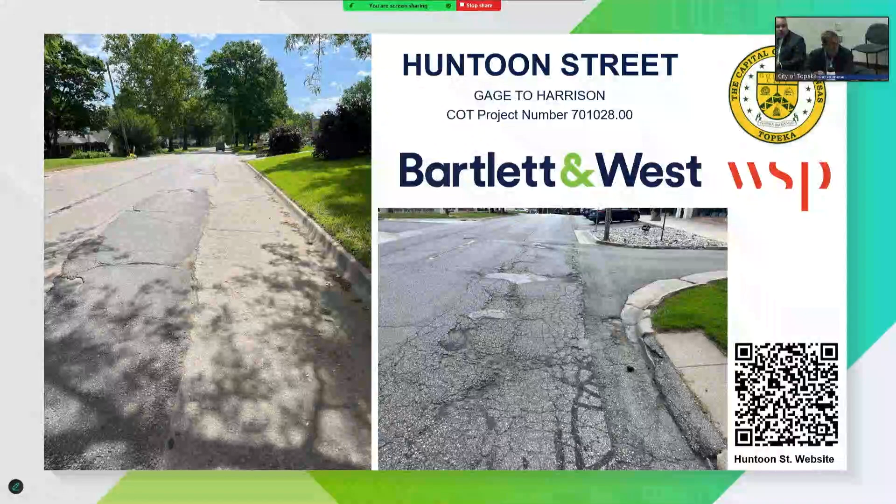Once that has been determined, then we will come back to the governing body with the design contract based on the guidance that they provide us. So Bartlett and West was selected as the consultant to provide the design services. And I will have Jeff Lawley provide an overview. He's prepared a PowerPoint presentation in terms of where we've been, what our options are, and our recommendation. Good morning, Jeff.

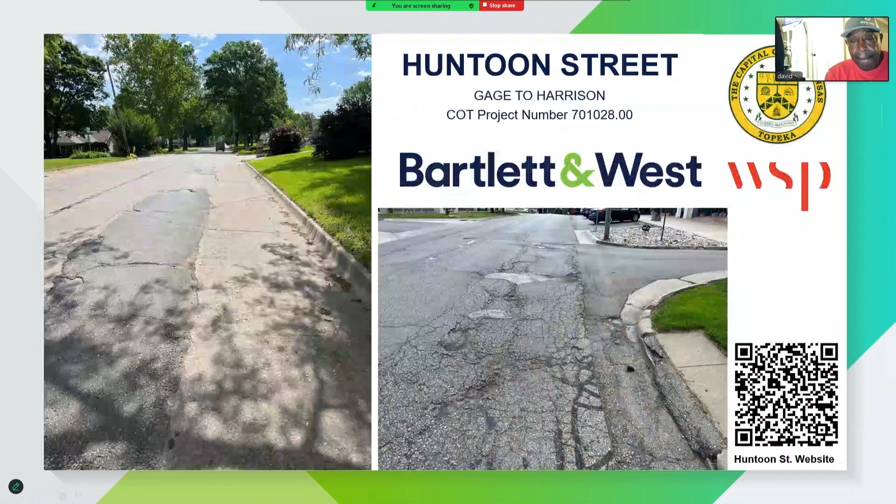Good morning. I'm Jeff Lawley with Bartlett West, the project manager for the Huntoon Street project. We are here to talk about what we've been up to over the last 3 to 4 months.

So currently what we've done is we've gone out there and had them core the existing roadway just to see what's going on beneath the pavement and understand, is there something going on beneath the pavement, or is it the pavement itself that's falling apart? We have some pictures up here of some of the cores that we have taken. It's not all the pictures, but a pretty good representative of what's going on for that 2.25 miles. And just from the cores, you can tell that most of the pavement's not really falling apart. I think you guys have seen some other cores for some other projects where you can just tell that things were not going to hold together. But from these cores, it looks like things are pretty good.

We've also done an existing utility review. We've looked at the city of Topeka utilities out there as much as we could to this point with sanitary, water and storm, just to see what all we have out there available to us. And we've also looked at third parties to see how much of a presence there is with fiber and Evergy and other third parties, just to see what's all going on in that corridor. We've also done a traffic study. Our partners with WSP have also done a traffic study to kind of give an idea of what's all going on out there. We compared that with 12th Street. They've done a traffic study out there as well, a post-construction traffic study. So we've got all that information to kind of help guide us on where we want to go in the future.

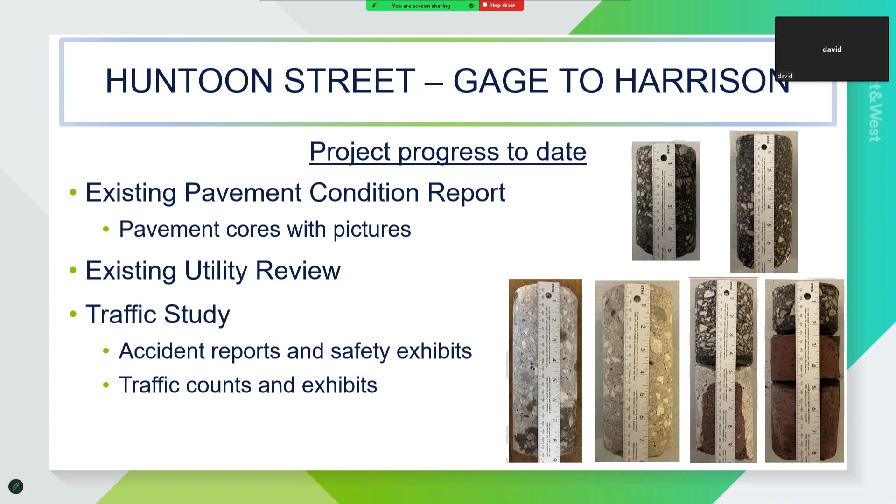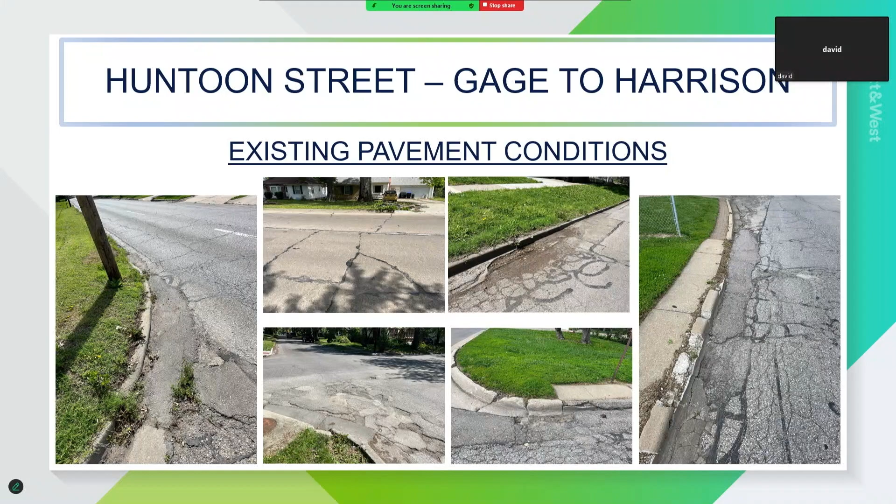Can I ask a quick question? Yeah, this is a presentation, but definitely if you have questions or comments, please feel free. Did you take cores on all parts, north to south of the road, not just going down the center or something? Yes, the different locations were all over the different parts of the roadway. Okay, yep, that's a good question, just to make sure you're not hitting the same thing over and over again. That's a very good question.

So for the City of Topeka utilities, we'll start with sanitary. Right now, they're finishing up videoing all their utilities through that area to get a better understanding of what they may need to do. The plan for sanitary is to handle any pipelining or other work before the project were to ever start. From what they've been able to see, they don't think it'll be very intensive, but we have a dollar amount in there just to have an understanding of what might happen with the sanitary utilities. If anything needed to be replaced as part of the project, it would be eligible for funding by the countywide sales tax funds used for the project.

For water, that's a little bit more intensive. A lot of the utilities throughout there are old and undersized, and we don't have enough pressure for fire lines and things like that. It's a suboptimal situation with the water, so we have a pretty wide spread there of 2.7 million to 6.3 million. The 2.7 million was just the bare minimum to replace aging utilities, and the 6.3 million was to get it up to speed to where it needs to be. There's a 12-inch water line that needs to be installed along Huntoon, either for the entire length or certain portions, to go along with what was done on 12th Street, making sure that corridor is properly fed for all the different properties and fire lines. We don't really know how that would work, but it is also eligible for funding by the countywide sales tax funds, any of that water work that's going on there.

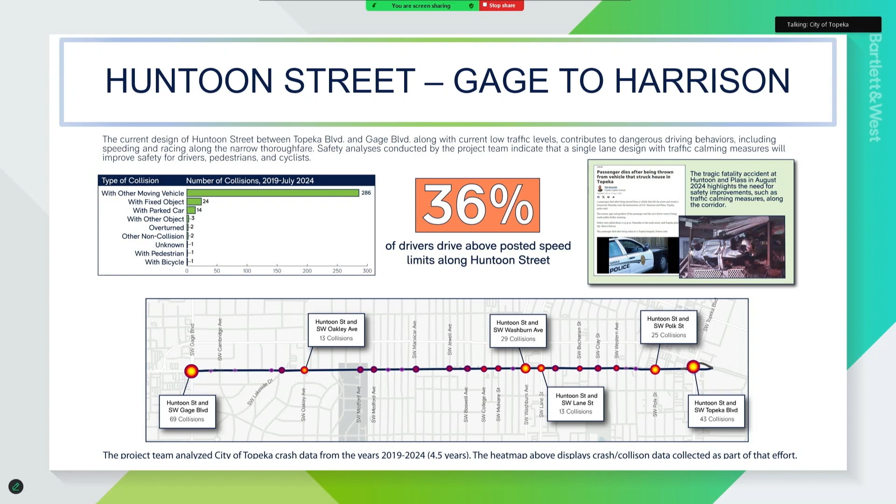And then we included the picture of the unfortunate accident that happened on Huntoon in August, where somebody left the roadway and ended up in somebody's front door, and that included a fatality. We thought that was unfortunate, but we wanted to make sure everybody was aware that it happened on Huntoon.

So that goes along with the next part of the study, which was: do we really need two lanes? And if we were to build with just one driving lane, would that be sufficient?

But then that goes on to: okay, if we only need 1 driving lane, what else is out there? We can't build a roadway with 1 lane and curb, that just doesn't work. If there's an accident, you need some room on the side to allow people by or allow emergency vehicles to get through. So we need to find out what else would be adjacent to that drive lane.

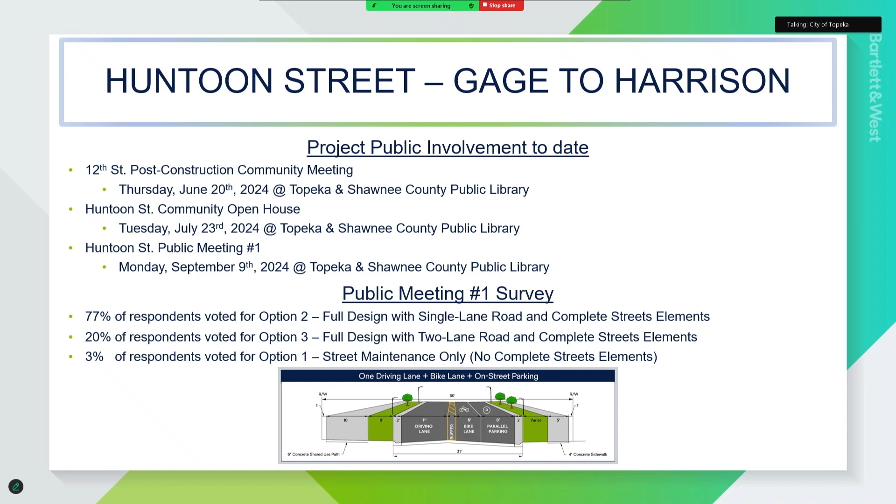The third option was a 2-lane roadway, and it says complete street elements, but really the only thing we'd have room for is a shared use path. We could do some other improvements, but with a 2-lane roadway you don't have room for a bike lane and on-street parking — we just don't have the right-of-way, the room, or the budget to do all of those things.

So we presented the public with those 3 options, and out of all the people who responded, both at the meeting and online, only 3% voted for option 1, just doing street maintenance. 77% of those who responded voted for the single lane road with some type of complete street elements. At that meeting, we had everything available to them that could be an option, and we didn't narrow anything down — we just showed them what we could do out there.

And then 20% responded with the 2-lane road with the shared use path. So 97% of people wanted something done out there and not street maintenance.

Sidewalk infill, if there's any sidewalk out there that's not there today, we'd put that in. And then whatever is left with the roadway, we would mill and overlay it so it would have a new surface. And that would still be 3 years of construction. There's still a lot of construction for a street maintenance project.

And the estimate for that was $7 to $9 million in today's dollars for construction. And of course, out of all that, you don't get any complete street elements, no shared use path, no bike lane, no traffic calming elements, nothing. We don't get street lighting, and you don't get any improvements to private drives.

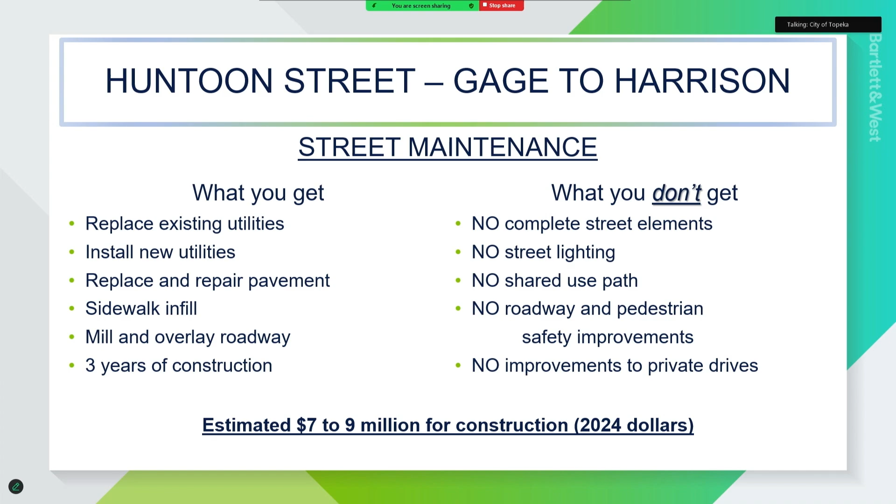So for the full depth reconstruction recommendation that we had, again, the preferred option by 77% of the survey respondents was the 1 lane with complete street elements.

With that project, you'd get a new roadway and storm sewer, and it would include a shared use path, sidewalks and ramps, bike lane and on-street parking, street lighting and landscaping, new traffic signals, and driver and pedestrian safety improvements to all the intersections. So for that, in today's dollars, $13.3 million was the estimate for construction.

So you compare that to the $7 to $9 million for street maintenance. And we projected it forward to 2027 because that's when construction would potentially begin. And that was $14.9 million. And then we compared that to what we have in the budget for this project for construction, which was 15.9.

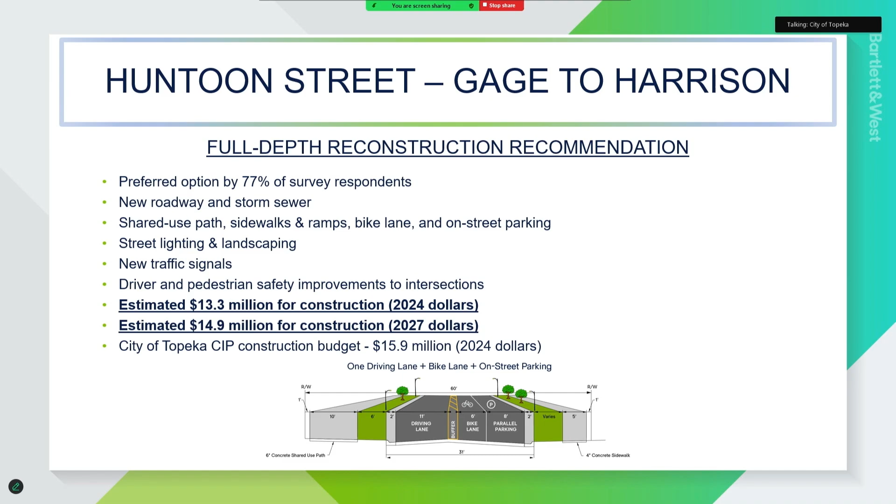We just wanted to make sure that everybody knew that we were still in line with what was planned dollar-wise, even though the planning was done a few years ago. So still within the budget to do all the things that we would recommend for a full-depth reconstruction project.

So a question was asked before, like, what does that look like moving forward? If the decision was made to do a street maintenance and just repair stuff out there as it is today, or if we did a full project, what would that look like over the next 10, 20, 30 years? Maintaining those different projects. So we took the time to stretch that out over the next 40 years.

So for the first line was if we completely started new and did a whole new project, and what that dollar amount would be, the max amount that we have for our estimate, and that was just under 15 million. And you stretch that out with all the different maintenance you would do over the next 40 years, the total dollars would be about 21.3 million for that project.

If we chose to do a street maintenance option and just repair what's out there, and then just repair the roadway for the next 40 years, not doing any improvements to the curb or the side roads or anything else, just the pavement, then at the end of that 40 years, we would end at 20.7 million.

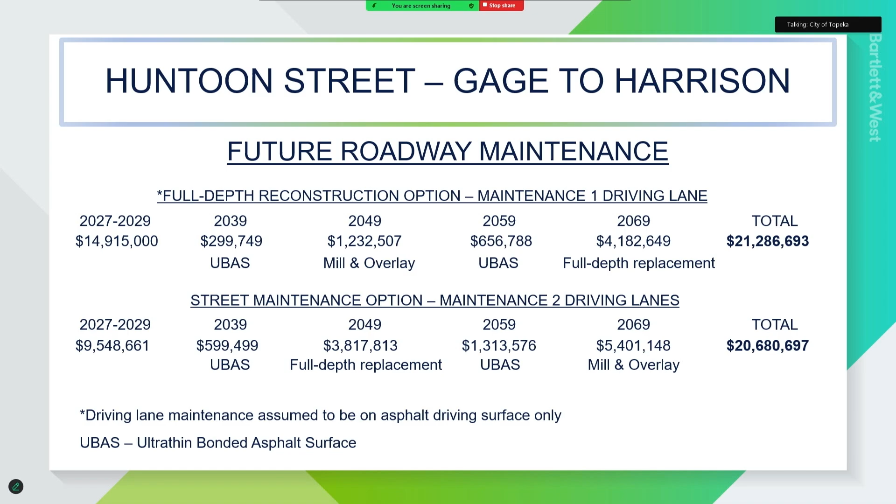So $600,000 saved over 40 years, and we still don't have anything new or improved, no amenities, no street lighting, nothing out there. So we thought that would be something that would be worthwhile for folks to know, just wanting to know how that all would work out throughout the future.

And this last slide was just kind of showing, if somebody had the question, how does this typical section fit? If we try and do everything, if we try and do a shared use path, a driving lane, a bike lane, and parking, it seems like a lot. Does that fit out there?

So the slide we're showing is the area that has the most restrictive right-of-way, and just showing that it does fit through there without having to take any right-of-way or negatively affect any of the residents through here. For the most part, it fits within the existing corridor. The only places it does affect them is where there's no sidewalk today.

We'd be putting in a sidewalk or a shared use path, and that does affect their private drives one way or the other. So that is what we wanted to show for that last slide.

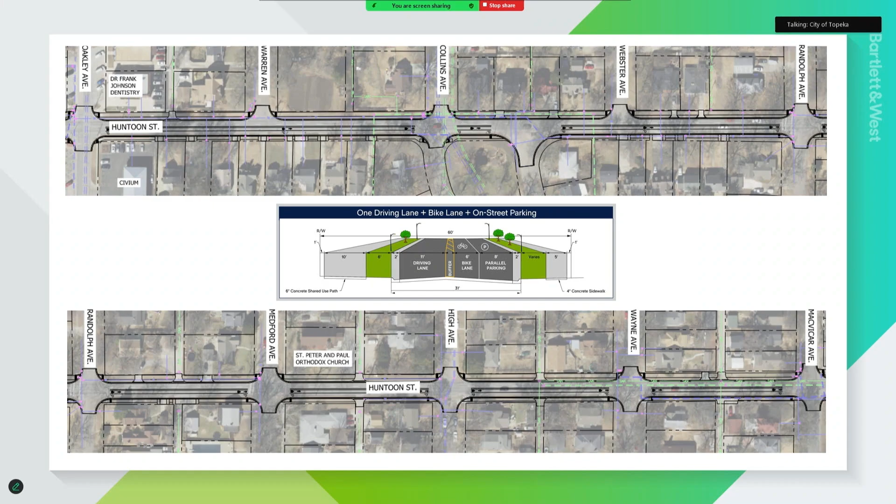So a lot of information shared over the last 15 minutes. Does anybody have any questions or concerns or comments? I have a few questions.

Did your public meeting include businesses in that area? Yes, it did. How many businesses showed up? Just from that meeting, and we had another meeting too for the businesses at Oakley and Huntoon. We had a few folks show up for that as well. I think we've probably hit 5 or 6 maybe of those folks there.

So you had a separate meeting? We did, because we know that sometimes it's hard to get away from your business, especially when you're a small business owner, to go to a meeting scheduled during the times that you're busy. So we wanted to give them an opportunity to show up and share their concerns and any comments they may have, and we had a few other people show up that were not able to make the original meeting.

Okay, I want to go back, and this might not be for you. Do you have any questions for him? I will, but go ahead with yours. Okay, this might be a question for staff.

I'm not sure. So if I was to say, let's prolong this another couple, 2 years, 3 years, like Braxton, we looked at some streets in my district, and you said they're at 30%. What percent is this street at? Do you have the PCI?

I do have a PCI on this. We'll get that information on the PCI along Huntoon to the board. Okay, because with our budget being tight next year in '26 and '27,